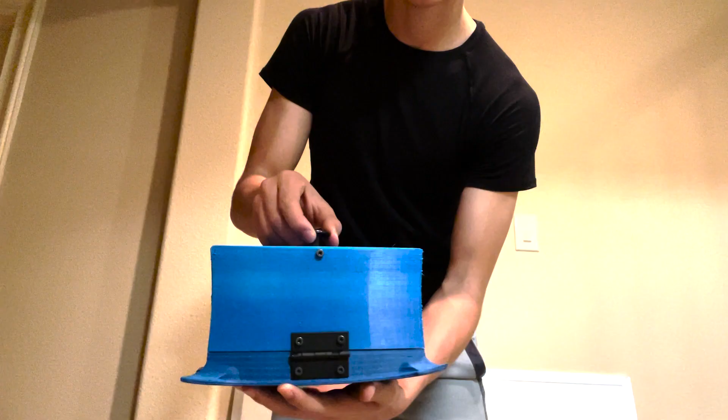Today I'm doing a trick with a 3D printed magic box. This was inspired by another magic video which will be in the video description.

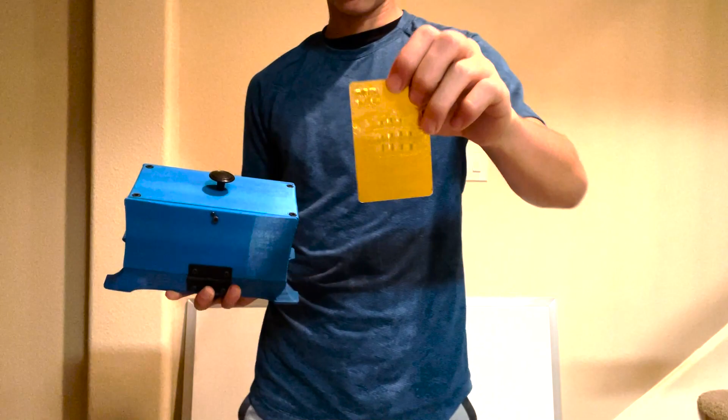So that's the magic box trick. This was just a side project to test what my new 3D printer was capable of printing. My magic skills definitely need work, but I'm fairly happy with how the box turned out.

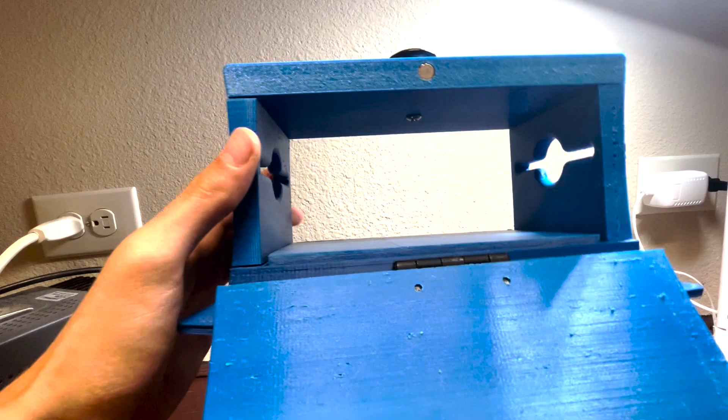So how does it work? The secret is that there's a hidden compartment that you can easily lift up with your pinky finger and then access whatever is inside by aligning it with the hole on the side of the box.

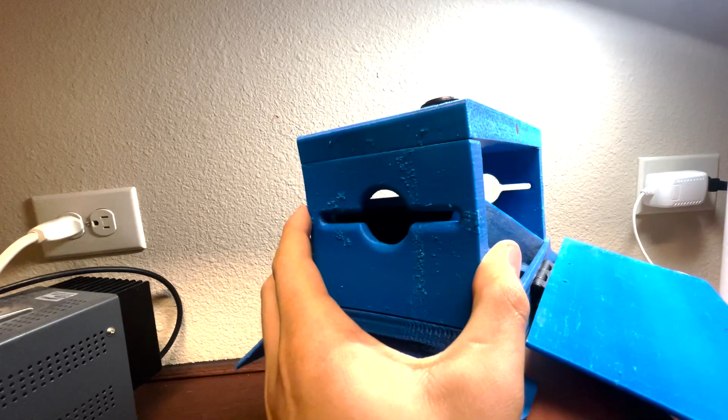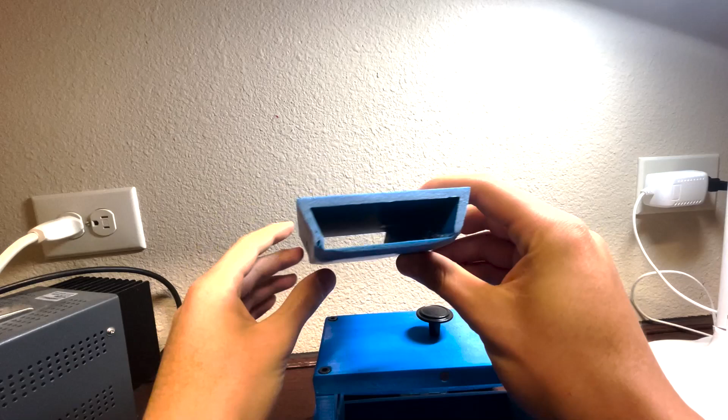And here's the compartment by itself. The reason why it looks so rough is I forgot to add enough clearance in the design, so I sanded down the sides so that it fit into the base of the box.

Despite around 20 minutes of sanding, I could not get the compartment fully flush with the base, and that's why you can see the compartment slightly sticking out if you look closely enough.

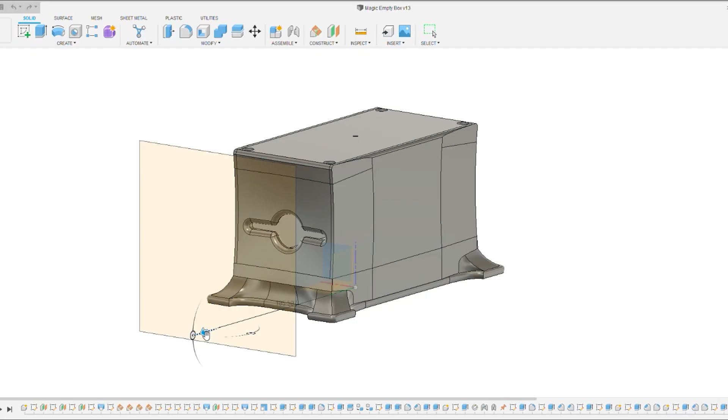Here are a few cross sections of the design. As you can see, there's certainly not enough clearance, especially with how inaccurate my 3D printer currently is.

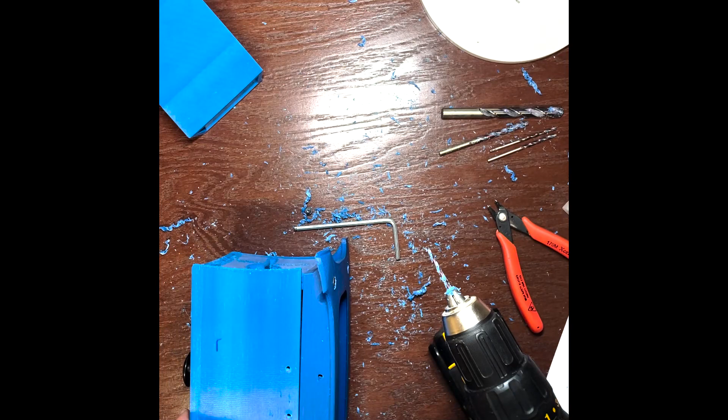So that's basically it. After that, I just installed a couple hinges to connect the side faces and then added a cabinet knob to the top for ease of carriage.